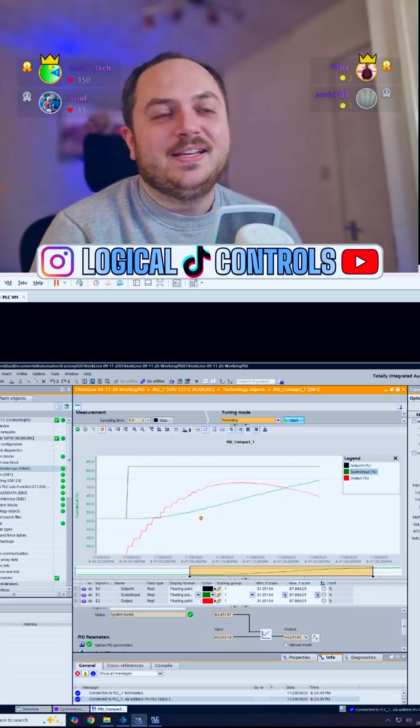What's going on with this?

We're going to be reviewing the PLC challenge submissions tonight.

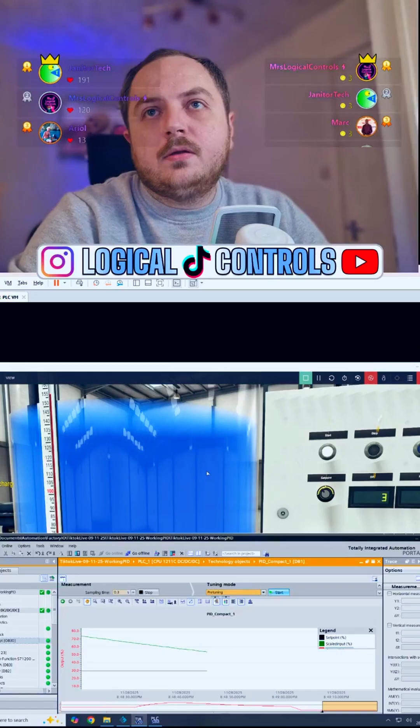Can't quite get it so I can show it all nicely. You can see the level is coming down. Oh, that's better, that's better.

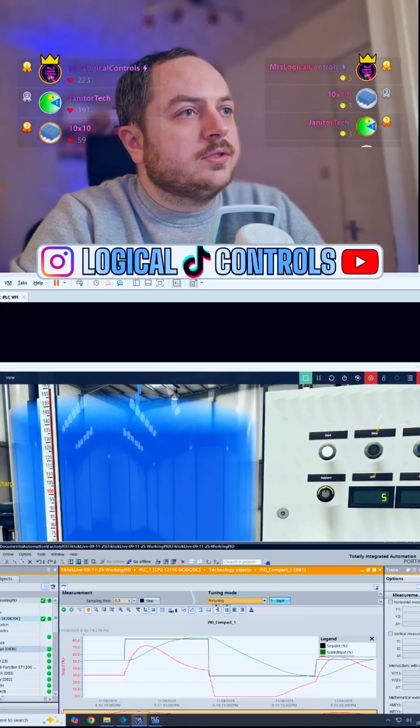We don't think we use that on roofs here, we just use tiles, but on shed roofs and stuff they use bitumen and get the big flamethrower thing out and melt it all. I don't know the technical terms of roofing, but that's what it seems like to me anyway. So all your houses are slates, okay.

Pink Beef, I think, this isn't a game, mate, this is just a simulation software. We're not going to be looking at all this tonight, though. Tonight we're looking at... so I've had a PLC challenge going for 2 weeks now.

Tonight's the night we're going to review all the submissions. There isn't many, I think there's five or six, something like that. But the reason I brought this up is because the submissions are based very closely on this, the filling of a tank. So we're going to be looking at viewers' submissions, basically.

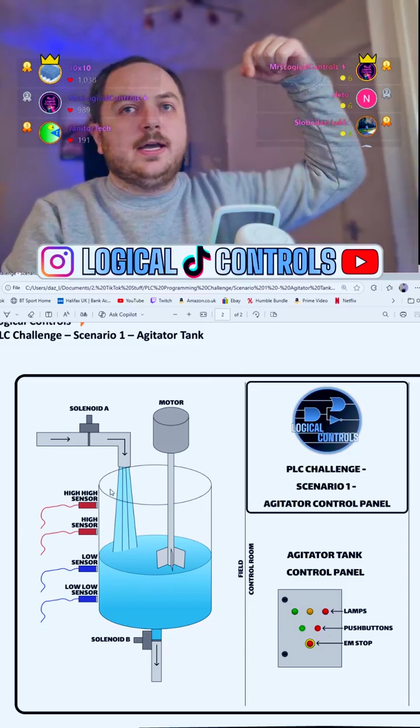We have some level sensors, this is all digital control, so we have some level sensor feedback. We have a low low, a low, a high, and a high high, which is pretty typical in at least the tanks that I deal with at work. There's normally 4 switches arranged just like that. Normally they're actually on a long rod, and all the switches are in different parts of the rod.

We also have a control panel which has on it some lamps - green lamp, amber lamp, red lamp. We have 2 push buttons, start push button, stop push button, and we have an emergency stop.

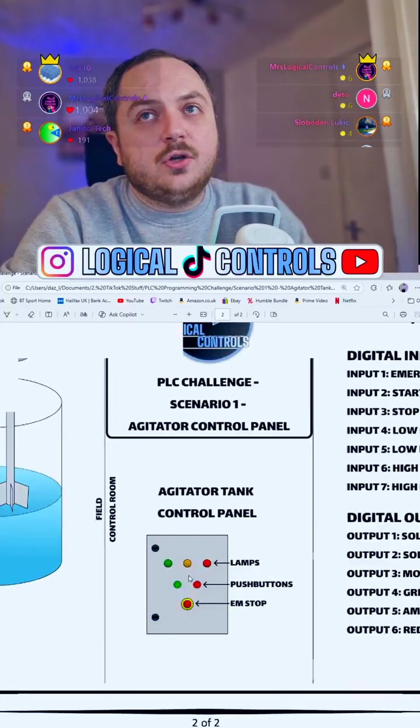I've detailed all the I/O here, which is basically what we've just run through. So we've got our inputs up here, we've got our outputs down here, and I basically put together a bit of a description of how this needs to work.

The idea was people can just go off in their own time, and if you're very new to programming, this would be a good chance for you to try and learn, practice, improve your skills. And if you program every day, it was a chance to just show off your skills, showcase.

Slobodan, thank you, appreciate that mate. Thank you. Evening, the engineer, how are you tonight mate?

So this was just for the people who are experienced in PLC programming, this was an opportunity to showcase your skills, maybe experiment a little bit, try something a little bit different. It's very simple, there's not a great deal to it.

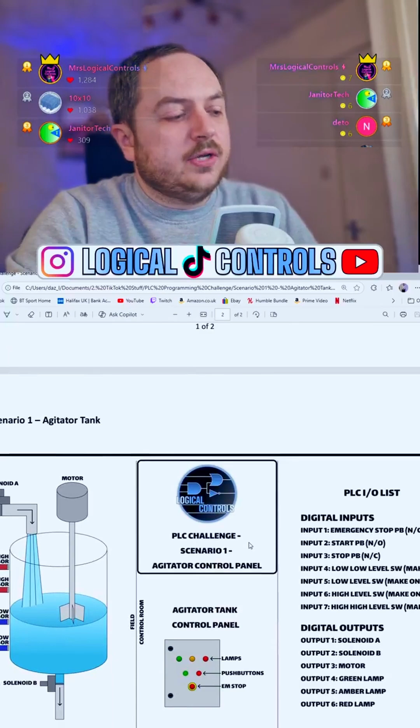So that is what we're going to be looking at tonight. We're going to be looking at other people who have submitted theirs. I've submitted my own one. We can even look at mine.

Don't look at yours, you just had to play it. Ash, I'm 100% looking at yours, mate.

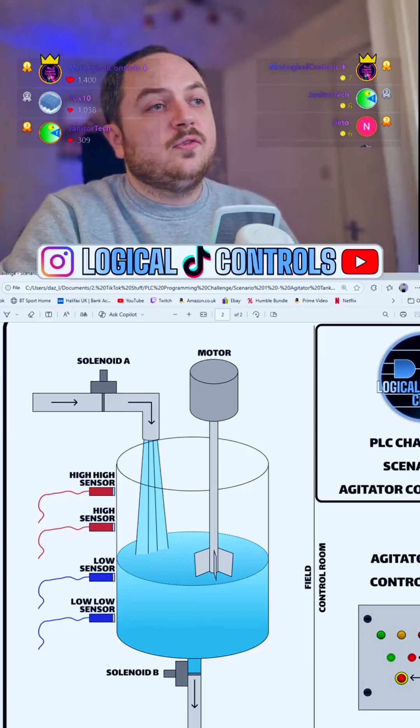Nah, it's fine mate, don't worry about it, engineer. It's all right, we'll do more in the future. Appreciate that, Jordsky, thank you mate.

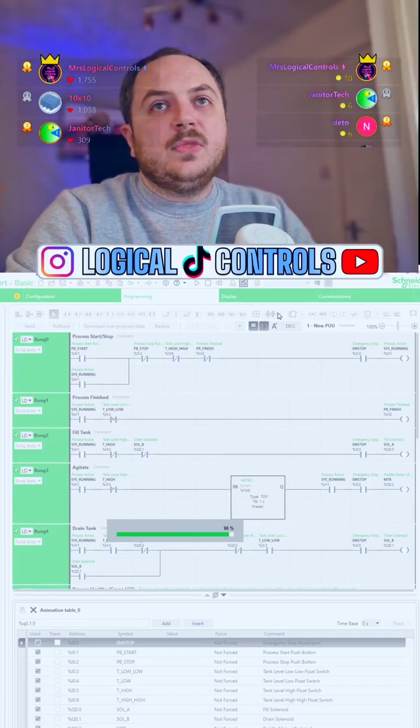Go away Norton. Right, so this was Big Lozzies submission. He did his in Machine Expert Basic, which was one of the free softwares. This is probably going to be a little bit difficult to simulate, but it'll be fine. Let me put it into simulation mode. Launch simulator, it's that one. And we're basically just going to look at how the software works, what it's doing, and just make sure it's roughly following the spec.

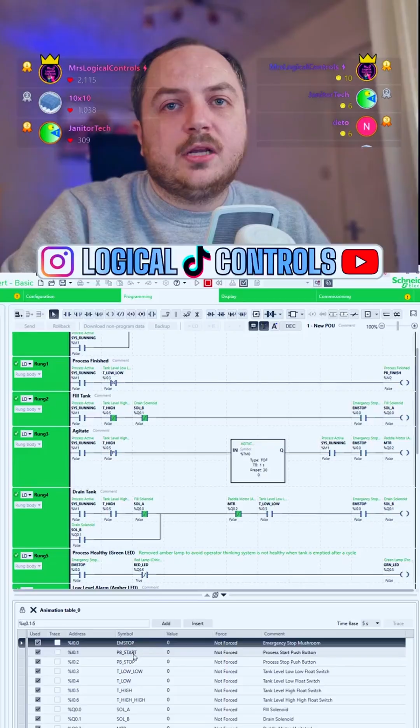So what we need to do is, I might have to simulate the emergency stop and the normally closed being on, because they are normally closed, so they would be on in a healthy situation. So let's put a value in, force to 1, force to 1.

Was there any more normally closed? I don't think there was - emergency stop and stop, the rest were make on rise. The start button was normally open. That's fine, okay.

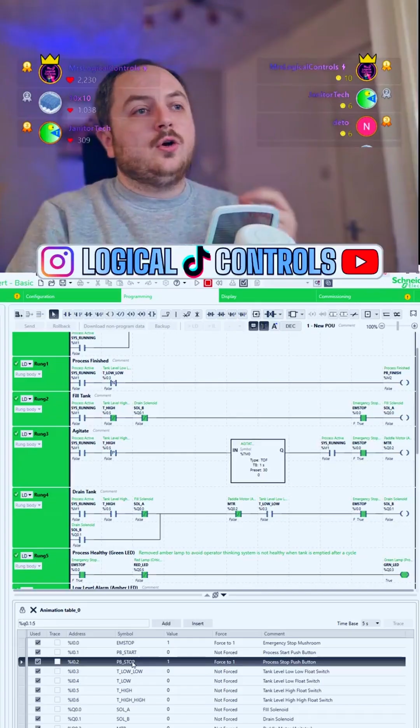So them two are on: emergency stop push button is on, and the normal stop push button is on. So because they're normally closed contacts, they would always be on when healthy, and only when you press the E-stop inward do you lose that signal, because it's a normally closed that you're activating.

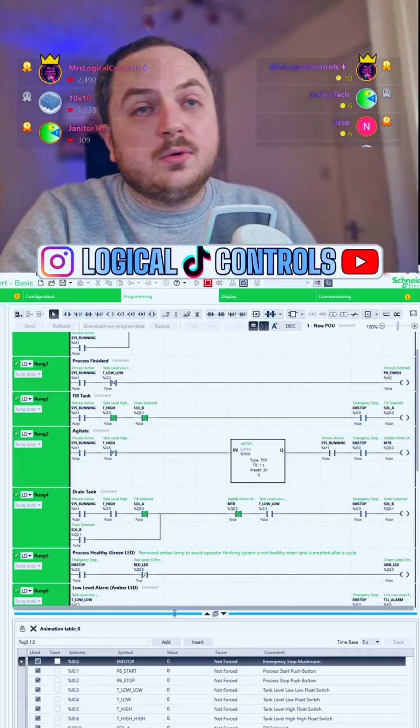Oh, Big Loz, you've done stop logic backwards. Oh no, we've failed already. That's fine, it's cool mate, what I'll do is I'll just turn them off. Don't worry about it, like I said, there's no harsh criticisms, I'm not going to tear your program apart. I just want to see it working, showcase what you've done, see how you've done things, because everyone does things different. There's no right and wrong way when it comes to PLC programming, as long as it works, that's the main thing I guess.

EM stop's correct but you didn't change it. Right, okay, so I'll put the EM stop to 1. Right, okay.

So to start off with, his first rung is the process start stop, which is his latch for latching up the start button. The minute I press the start button, the logic will go true. We'll then pass through the stop, the high high, the finish, and also the emergency stop. It will activate the system running, which should latch itself up. And then it looks like he's put the system running bit in every rung, which, to be fair, I think I might have done the same thing.

So let's start with that then. If I press the start button, what we should find is somewhere in the logic will be an output for solenoid A over here. You can see that, just about.

Can I pull it over a little bit? I mean, you guys can't really see that very well, can you? Maybe I can't zoom in too much. How far can you see? Not quite all the way. From there right across to there. Right, that should be better. You should be able to see that better now. Maybe, maybe? Appreciate the follow. Thank you, mate, sorry, can't pronounce your name.

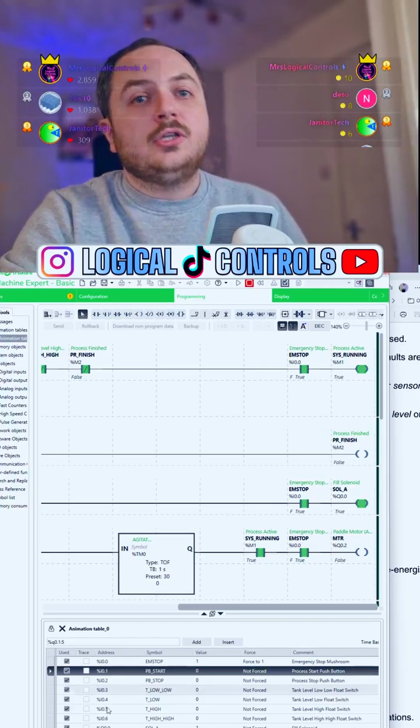So if we go back to the diagram, at this point what we've done is pressed the start button on the control panel. Solenoid A has opened and is now filling the tank. As the tank fills, the low level sensor is a make-on-rise switch. As the tank level increases, that switch will close, the low level switch will close, and we'll keep going until the high level switch eventually closes.

So let's keep going then. We're filling, solenoid A is still on. I'm going to activate the low sensor - this simulates the tank filling. It's got past the low low sensor, then gets past the low sensor. I'm going to turn that on as well.

Nothing should be happening at this point, so I'm checking the outputs at the same time. We have got a green LED - I don't know if you can see that very well. So the green LED is this one here. We've got the green light on because it's healthy now. Once we got past the low switch, it should have gone green.

Right, so we've got low, low. Once I put the high level switch on, so once the tank has reached the high level, solenoid A should go off and the motor should start to agitate the fluid in the tank. So let's go and turn that to a 1. I can see the motor has now come on, solenoid A has gone off.

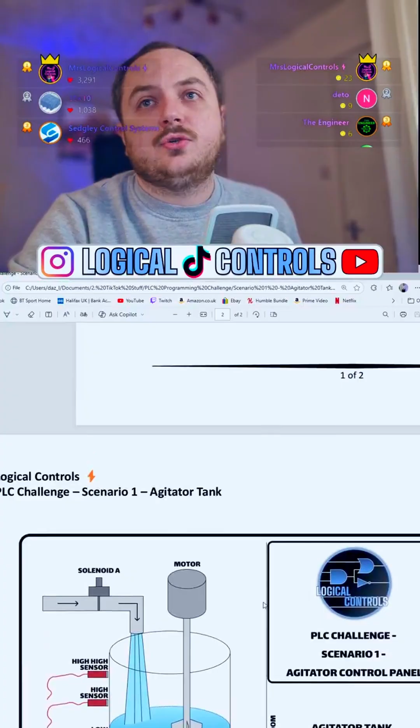What does his green lamp logic look like? As long as he hasn't got an emergency stop and he hasn't got a red light, his green light's on. I think that's fine, I don't know if I really specified what the green light should or shouldn't be doing. Let's have a quick look. Green light should be on when the system is powered, no faults are active, and the process is ready or running. I think I might have done that wrong, I don't think I read that properly.

I think mine goes off. But I'd say well done to you, Big Loz, that worked perfectly fine. If I do smash the e-stop, let me start the process again.

I do want to see the e-stop actually turning everything off. So I press the start button. That's gone off, solenoid A has come on. We go past low, we go low, we go past low, we get to high. The motor is now running. I smashed the e-stop. The motor stopped, the red light came on.

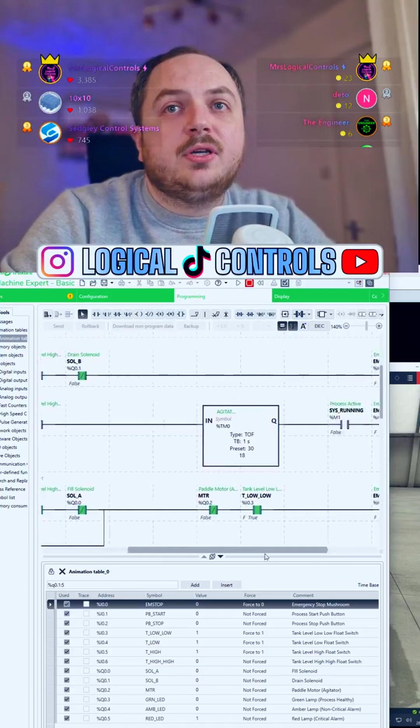So I'd say that works perfect, yeah that works perfect. So everyone give a big round of applause to Big Loz, he did that, he smashed it. It's difficult to show it on Machine Expert Basic because there's no... I know some guys have put HMIs on, so we'll be able to actually see it happening. I'm sure there'll still be a bit of simulation going on, but for the most part that worked really well, Big Loz. Well done mate, appreciate you joining and doing the challenge.

He also has... so let's just have a quick look as well. This was something I was looking out for, something I think I put in mine, which is basically a sensor error state. So if we go back to this diagram, this is something you would need to think about on a real job, on a proper tank. You have 4 switches, they work in a certain way.

Who's that? SF9er, I think. Appreciate that, thank you mate. Thank you for the fest pops.

You also added a bit of logic into the sensor. Yeah, I was just getting to that, Big Loz. Appreciate that, SF9er, thank you mate, really really appreciate that. So, yeah, on a proper tank you have these 4 switches.

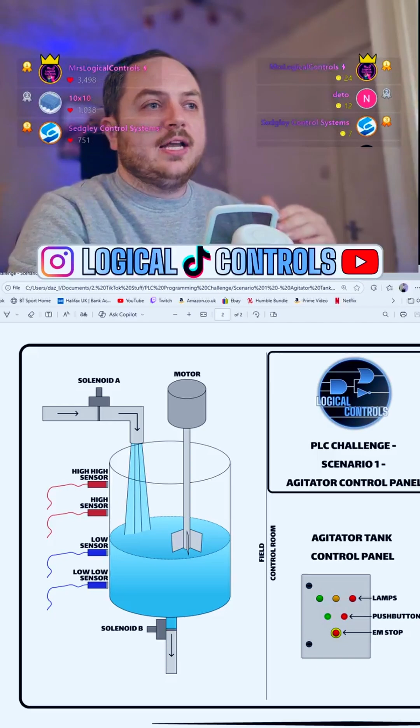On this one, they're all make on rise. So at no point should you ever have the low sensor closed, but the high sensor open - that shouldn't happen, because as the tank level rises, the switches close in sequence. And if the low sensor was off, but the high sensor was closed, there would be an issue there - there's something wrong with your switches.

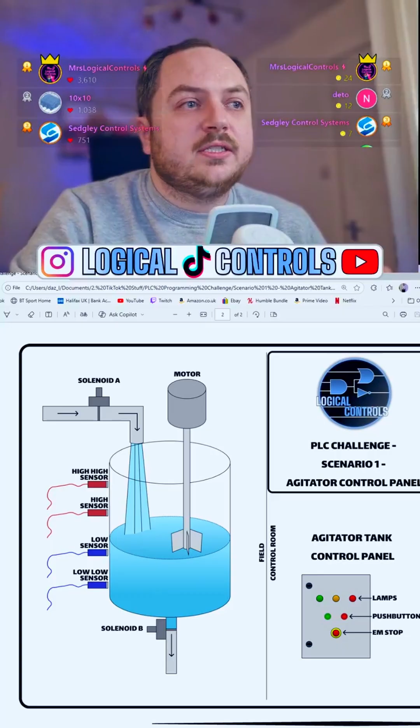So I can see that he has put in a bit of logic for that. And if we just simulate that, how does that look? So if the low was to go off now in this scenario - in fact we've already got a red light on because the e-stop's not on. Let's unforce that. No, we need to force that even. Red light's gone off, but if I put on...

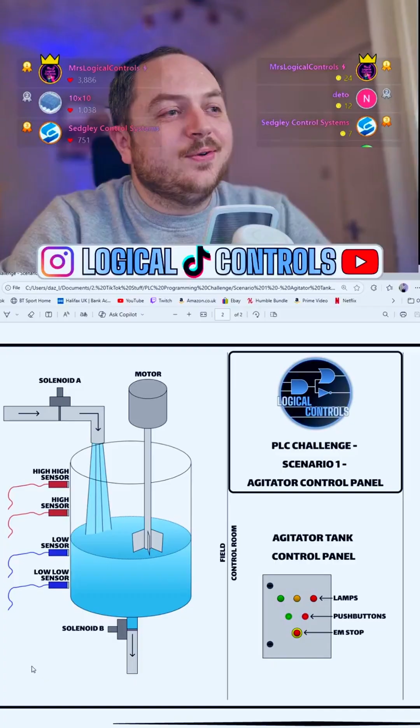If you're in France and do some electricity, I'm looking for someone to recruit. Deto, unfortunately I'm not - I'm in the UK, buddy.

What software? The software for this is Machine Expert Basic. This is a PLC programming software for Schneider M221 PLCs. It's free to download, doesn't cost you a penny. It has limitations - you can only program it in ladder or instruction list, and I think it might even be able to switch between the two on the fly somewhere. I know nothing about instruction list, I would never ever try and learn it. I can do it, but I can't do it while I'm live.

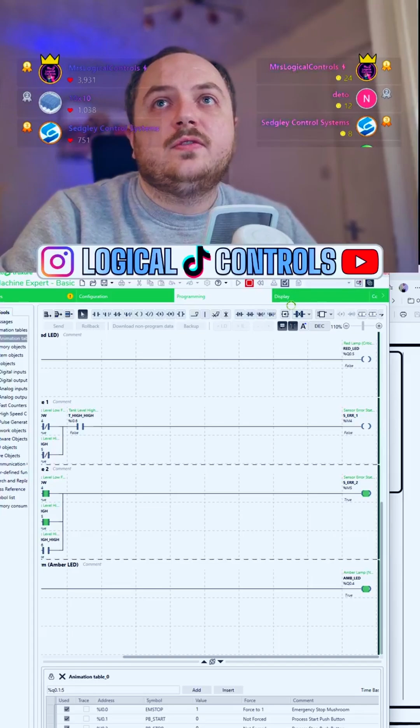So if I turn off the simulation, I can put it in instruction list format. It sort of can chop and change between the two. But yeah, I don't know this programming language. I know ladder though.

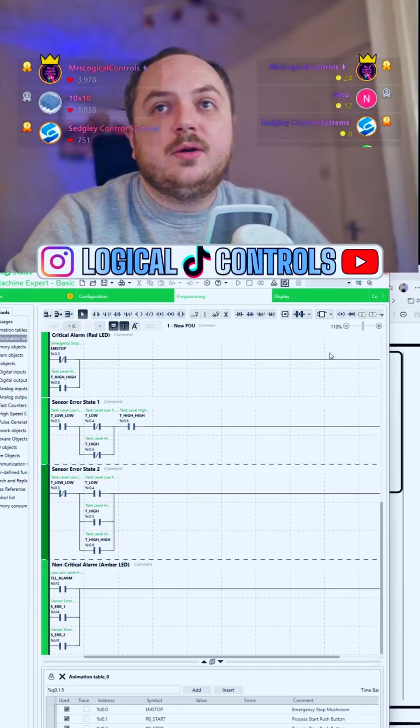Yeah, no, I appreciate you joining us as well, Big Loz. Thank you for that, mate. So yeah, well done, Big Loz, you smashed it. I'd say that one's done.

Who's next? Jack, who was Critical Shit, I think, in the Discord. I'll open up his next.

So it's just loading up CODESYS. Jack did his in CODESYS, another free software. This is the programming software I use for mine, mainly because it had the HMI element to it, so I wanted to add some visualization. Tommy, appreciate the follow, thank you mate.

Just let this load up a second.

Xander Robert, I don't really do SCADA, to be fair mate. Not really, I've worked with one or two maybe now, but it was a while back.

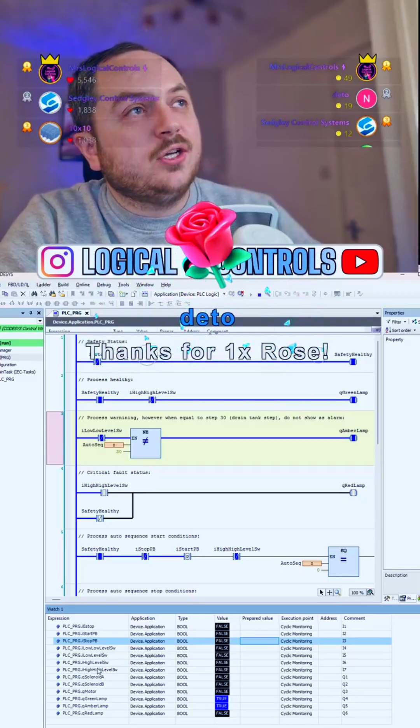So the first thing we need to do is press the start button. When we press the start button, we should get - let's go across - we should get solenoid A opening up. You can't see that. That's better. So solenoid A should open and start filling the tank when we press the start button. Eventually the tank's going to fill.

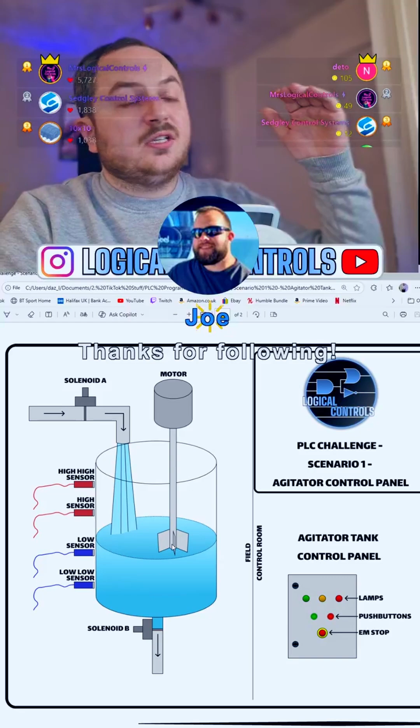Once we get past the low low level sensor, the amber lamp should go off. Once we go past the low sensor, nothing really happens. Then we get to the high sensor. Solenoid A should close and the motor should start agitating.

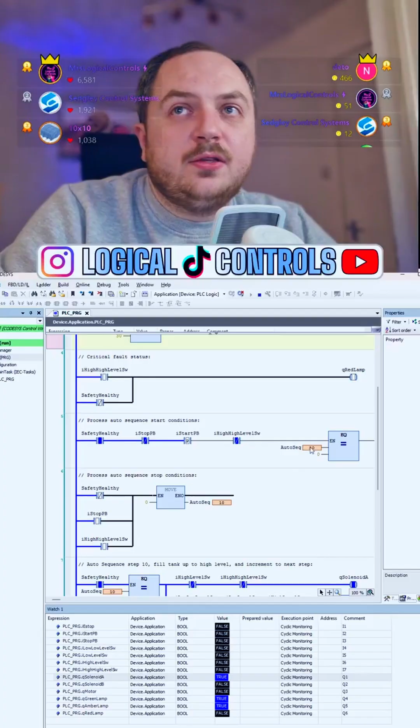So Jack's done this a little bit differently, he's done it as a sequencer. So we've got the value of number 10 in the sequencer, and that's because we pressed the start button. He put the number 10 in because we had these conditions healthy: the safety was healthy, which is his e-stop; the stop button isn't pressed in; the start button was pressed in, which he's done on a pulse, a high pulse - that's pretty good; and the high level switch isn't on. So once we get into sequence 10, that's where this is coming from. He doesn't need to do any latching because he's done it as a sequencer.

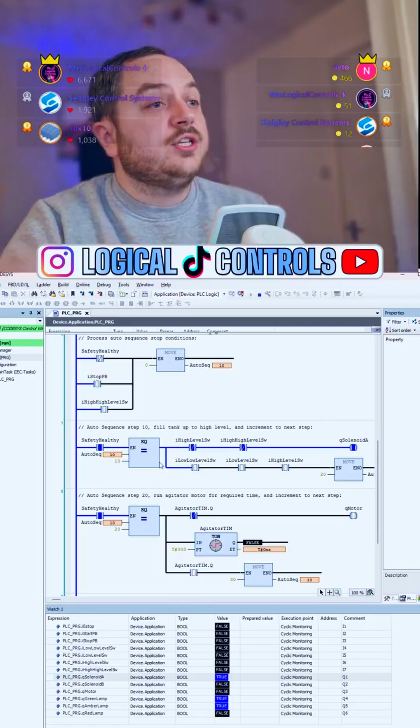Okay, so the tank at this point is starting to fill. The solenoid is open, the tank is filling. The next thing we need to do is put the low sensor on, and we should see the amber lamp, which is this one, go off. So if I put on the low sensor, that's this one here, F7. I need to get used to how you do this. And there we go, so the low sensor's come on, the amber lamp did go off.

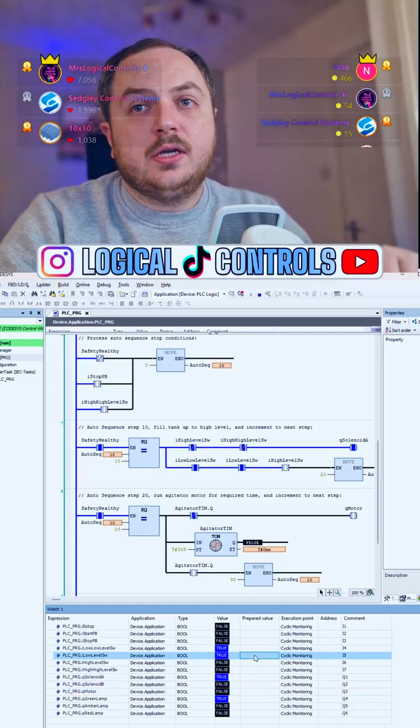That's good, so at this point the tank's still filling, the tank's still filling. We bring the low on - nothing should have happened when the low came on, it's still just filling. When we get to the high, solenoid A should go off, and then the motor should come on for 30 seconds. So I don't want to do that, I want to bring the high on, F7. So solenoid A went off, the motor is now running. So we've gone into sequence 20 now, you can see from the timer that it's counting up. And all this time the motor is running because this bit is on.

Once this timer elapses, this contact is going to open up and turn the motor off. I assume we go into another sequence, maybe solenoid B comes on. Looks like it, because once the timer expires, we move 30 in. It's working perfectly, solenoid B's on. The high level comes off, the tank's draining now. The low level comes off.

And once we get to the very bottom, solenoid B should... oh, I've not done it. Sorry, my apologies, solenoid B then goes off, and the amber lamp goes back on. That worked perfectly.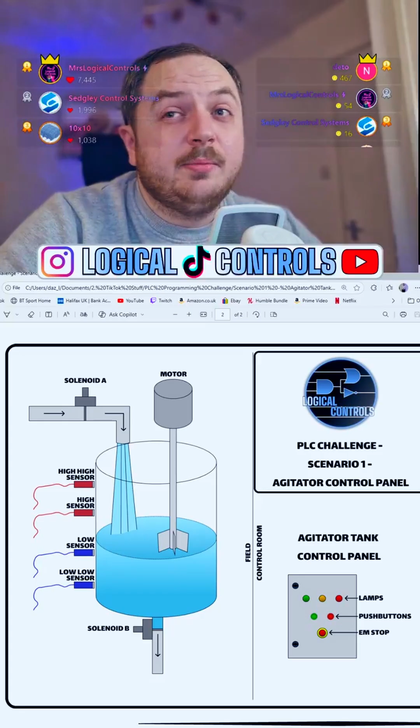Don't remember doing the amber lamp either. Yeah, sorry, I definitely missed leaving the green lamp on when the amber lamp's on. I did my logic where basically the green light could only be on if the amber and red light were off, so even I myself didn't do it right.

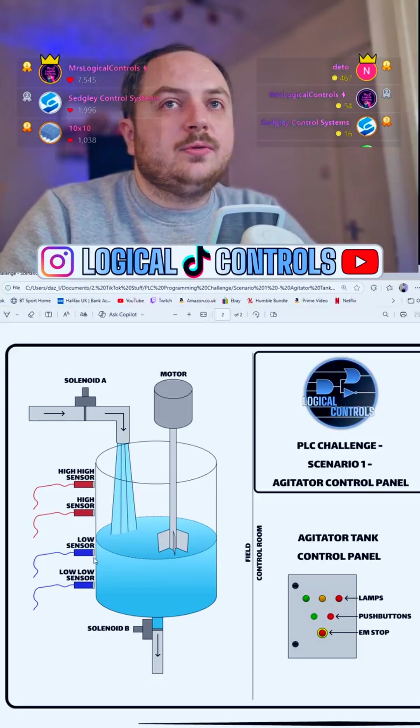Yeah, it is nice programming. I agree, and this was the whole point of the challenge, to see how different people did things differently. I like the way he's done the sequencer. And in fairness, although I didn't do a sequencer, and probably wouldn't on a normal job with a tank like this, I do like to see the way he's done it.

And it is a sequence, it's a process, step-by-step. So all we're doing here is following these process steps, 1 through 8. When I press the start button again, it'll just go 1 through 8, and again it'll go 1 through 8. So it is a sequence, and it makes perfect sense why he's used a sequencer.

It didn't even occur to me to use a sequencer, because like I say, it's not something I would normally do at work, using a sequencer in a tank filling exercise.

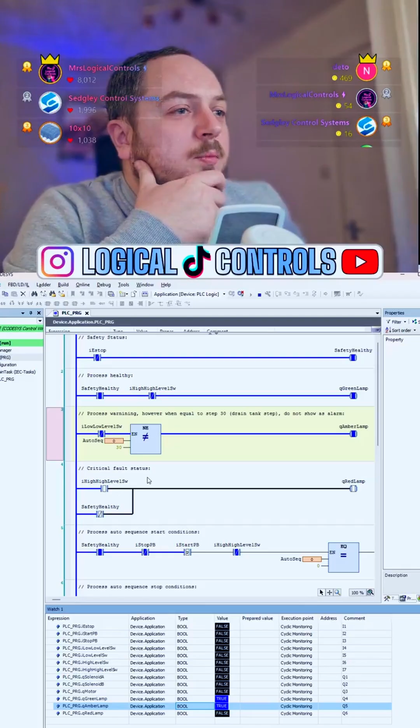Makes sense only in normal operation. If the flow of water stopped due to issues, the sequencer could get stuck. Yes, that would be the case, Michael, but he might have dealt with that. I don't actually know, I haven't looked through it enough yet.

Thanks for the follow. So these sequences there, has he got like a sequence 40 or a sequence something else?

Critical fault status is high, or is it E-stop? Oh, that's another thing, if I press the E-stop in, what happens? His red light came on, his amber lamp stayed on. That's probably fine, I don't know if I specified anything about that.

No, that was the first sequence. But, like I said, I'm not here to criticise or anything like that. I think he did a good job, I thought that was an interesting way of doing it.

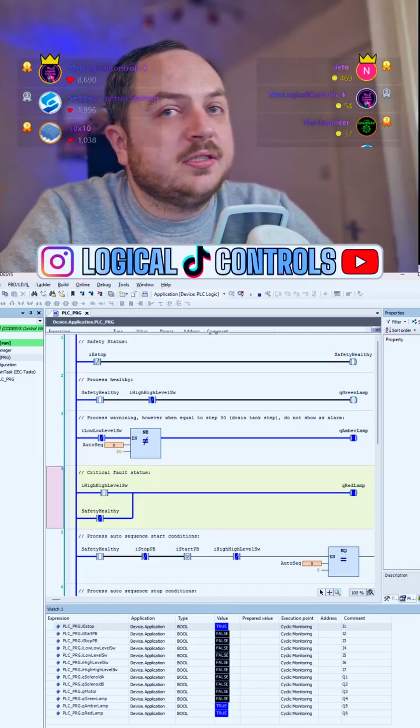So I use a lot of ABB switchgear - their ACBs, MCCBs, contactors, that sort of thing, but not really any of their control stuff. I guess the closest I've got to their PLCs, which isn't a PLC whatsoever, is their TruONE ATS.

Oh, he was chatting Dutch. Oh, okay, there must be other Dutch people in here then, is there?

Can I show how it goes to a next step? Yeah, I can show that. So, while we're live, who's that?

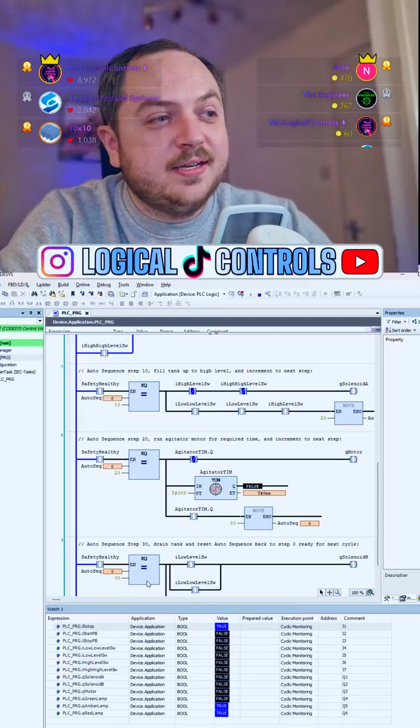Appreciate that. Right, so that was Jax. I appreciate him submitting, I hope he is in here somewhere and got to see that. I think that was another good submission, I enjoyed the way he did that. He thinks differently to the way I think. That was the whole point of this, to see how different people do different things. So let's close his down.

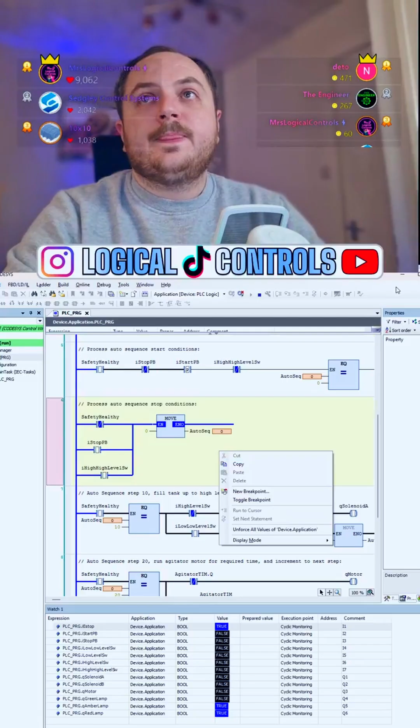Good submission, good submission. The next 3 are in Siemens. I might need some help with the Siemens side of bringing these in, because only one is showing as a file, which is Sedgley's. I assume it's because they were done in TIA 17. It doesn't look like it wants to open them, but I'll figure it out.

So let's just close down Factory IO for now, we don't need that at the moment. I'll just close it, let's bring this up. Close that project. Don't want to save, we're all good.

You're doing an online MSc in the UK - nice mate, what are you doing the MSc in?

You pronounce perfectly, Benelux is Belgium, Netherlands - oh okay, ah see, my dumb ass thought it was a football team. Okay yeah, I'm not good at geography, I'm not.

Engineering is about as good as it gets with me. Nice, nice. Zap is a zip file TIA.

So can I just open it from here? That's the question. Browse. Automation, PLC challenge - will it just open? No.

What do I do guys, what do I do? You can just open it from TIA. I'm doing something wrong then. I mean, I could just look at yours, Ash, I guess.

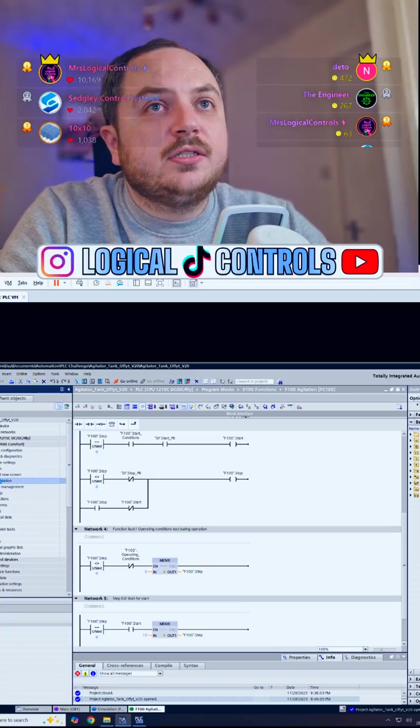Right, you might need to help me guys, because I don't really know how to work the HMIs. Screens, I'm imagining, simulation - if I bring that up, should be able to simulate this, right? Yeah, oh I see, yes, I have seen this, I've seen the picture in Discord. Yeah, he went to town with this one.

Tools, no. Online simulation, start, I think. I'm still learning this Siemens stuff.

Went to Amazon BVA1 this week to test out new features. I'm here at night watching PLC videos. Nice, Michael, nice, what are you doing there? What sort of work do you do?

deto, I don't speak a word of French, mate. I have no idea what you just said.

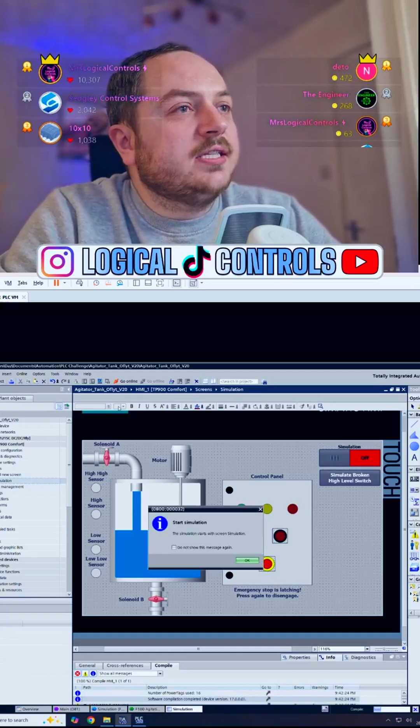Had quite an interesting fault the other day with a dodgy isolator in an MCC causing an e-stop trip. How was it, was there an auxiliary contact or something?

Start simulation. Okay.

I've not used any of the HMI stuff yet in TIA Portal. Can I make that bigger? Will it make it too big? No, it's probably better like that.

Need to go to control panel first and set the COM route for the PLC. Too many tags, power tags have been configured. Right, I don't know what I've done wrong. So this isn't going to work, is that right? Compile, simulator, right, so do I close this down?

Oh, you work for Amazon. I see.

Right, I'm going to assume this doesn't work, so I need to do something. Compile, up here, compile. Simulator, did I not do simulator?

Online simulation, is it with Tag Simulator? Is that what we're talking about? With Tag Simulator, HMI won't work - you need to simulate the PLC. Add tags and PLC simulate. Bloody hell, there's a bit going on here.

Hang on, right, I need to download the PLC. Okay, that makes sense, that does make sense. The PLC needs to be written into my simulation first. Connect.

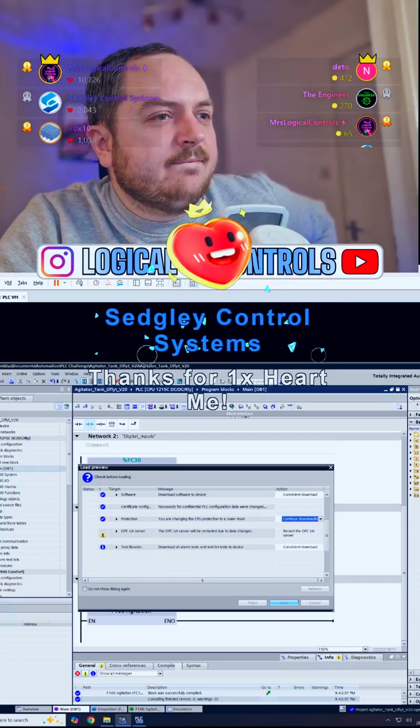Ash, are you there buddy? Still connecting - here he is. How's it going mate? Good, yeah.

Yeah good, you'll need to set the COM route to get the HMI to communicate with the simulator. Right, you got to talk me through it buddy. Control panel, control panel - where am I looking?

On your computer, control panel. Oh, in my actual... oh I see, on my actual computer, right, hang on then. Control panel.

Get rid of the categories and put it on the main view. PG. Set PG/PC interface, that's the one. Right, bloody hell, you have to do a bit then, don't you?

And then go to PLC sim. Is it all a bit small? I don't think I can make it any bigger. You're going to look at my forehead while I'm looking closely.

Stay where you were, don't click on that. Right, on the box below. Yeah, you see PLC sim. PLC sim local.

MPI maybe, not MPI. There's a TCP Profibus - do the one below. No, not Profibus. TCP, yeah try that. Right, now that's it.

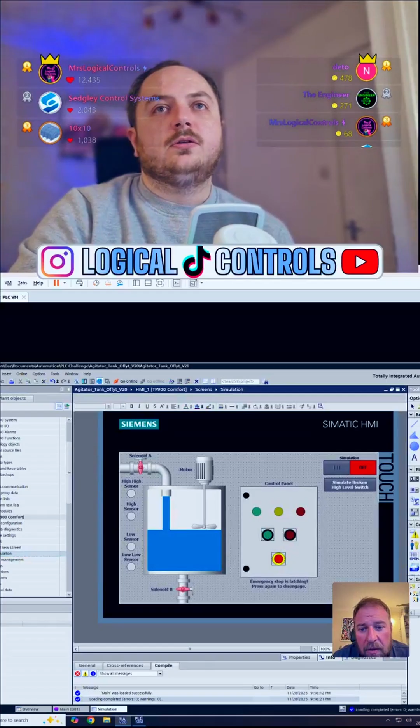Start, finish - now you should be able to just click on the HMI, click the same simulate button in the thing. Right, okay. Screens - can't see, no, just the main object. Oh, I don't need to open anything up then. No. There you go, just hit simulate. So now that gets the PLC talking to the HMI - PG set up.

Would I have to do that every time or is it done now? No, it's set until you change it to something else. It just allows you to - because obviously you can have a simulated HMI talking to a real life PLC. Yeah, I see.

Because you haven't got WinCC advanced runtime in, you get a tag warning - the simulation's just using HMI runtime, that's this warning here. So what would I need to do then to get rid of that? Put a WinCC license on - WinCC advanced runtime. But will it still work now? Yeah, it'll still work, it'll just keep popping up with a warning.

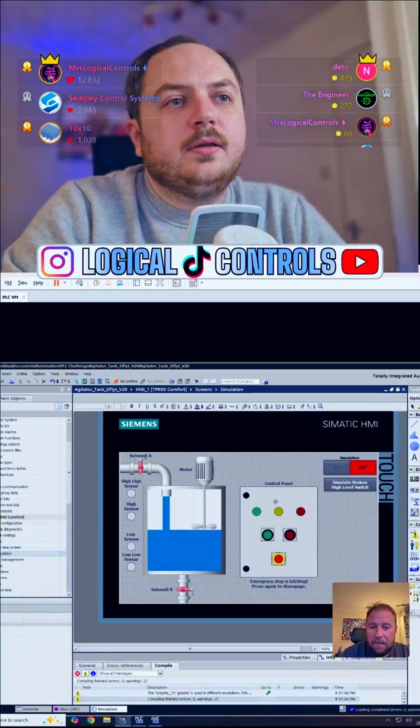Right, so I'm assuming I'll just click one of these buttons. You might have to change the interface, I can't remember which one it was. Is PLC sim up and running? I think so - put the PLC into run. Oh, is it not already in run? Can I do that from there? Yeah, it is in run, I think. Yeah, it's in run. I can't see the whole screen. Yeah, it's a bit small, isn't it. It's probably one of the other PLC sims in that list in control panel.

Well, that's not the screen anyway. No, that isn't the screen. You're right, I just noticed that. But it's not really doing a lot though. Anyway, yeah, I've probably told you to click the wrong PLC sim in control panel.

Oh, I see. So do I go back now? Just go back to control panel. Right, we'll get there. PG. So hit that's local, PLC sim local. Local, yeah, just hit that.

Okay, don't need to do anything else. No, just hit simulate on the HMI again. So on there, simulate button. Yeah.

One of them will work. Not yet. It hasn't got an error saying it's got no communication though. Where would it tell me that, or would it just pop up? It's just about this tags thing. WinCC runtime, too many tags. That doesn't matter, right, not for simulation.

So it's not that one. Do we just keep going through them? Import tags into simulator, you shouldn't have to, that's what the import engineer tags said, into a simulator. Right, what next then? What do we try next?

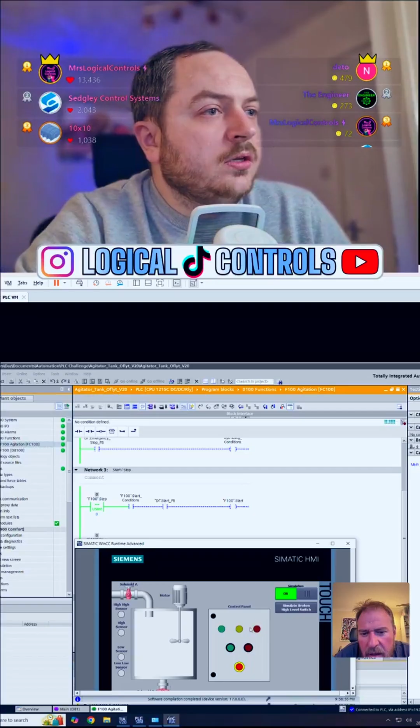But you change the interface. The lights worked before, did they? So, or maybe if we go back to the other interface then. Would I need to go offline for that, Ash, do you think? No, just close the simulation down for the HMI. Yeah, I've done that, that's good.

So when we was on TCP, we reckoned it worked. I normally use the ISO, I think. But ISO, this one here? Yeah, I think so. Let's give that a whirl. Right, so now simulate.

So the button's working, the lights are not on though. So you think the lights were on, Hugo? Is the PLC running? It is running. It's definitely running.

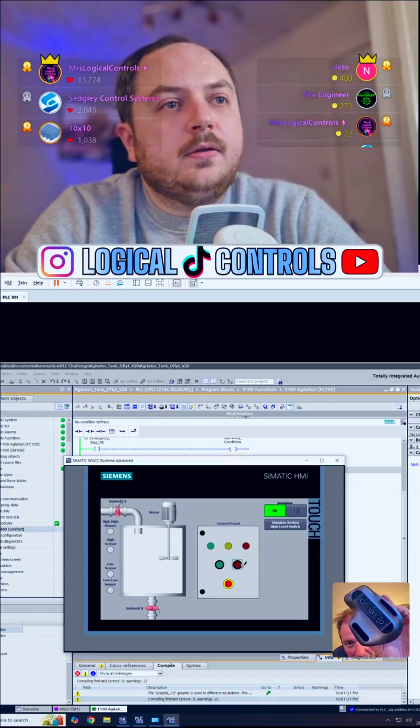MX Master 3S, best, no the Work 4's mouse come out and it's way better. Have you got one? Is that what it is? I'm using a Razer Viper 8K. There's a 3S and there's the 4. Ah I see, what's the wheel do? What's that for? Side scrolling. Oh, that look, yeah, that's handy isn't it? And that's a button. But the 3S have got tiny slide pads on, and they've upped the slide pads again now. Oh I see, so does that make it move a lot more smoother? Yeah, and the button clicking's way nicer, it's so much quieter. I got a Razer Viper at home, and then I got one for work just so I was consistent, I didn't want to change mouse up all the time. You got a 2S as well, you must like them, a 2S, 3S, and a 4.

Right, it was on local before I think. Well, I think he said the lights came on when I went to TCP. So do I just double click it? Yeah, I guess, yeah, double click it. All right, do that, what's the simulator on? You can have a look on the simulator, it'll tell you what it's on. No idea, what am I looking at?

What's it say there? PLC Sim Soft Bus. Yeah, yes that's ticked, internal. Yeah, so it should work on the local one, but... Well, let's try this anyway, one, give that a whirl.

Oh, there you go, ah okay. So the TCP one works, the light's on. I press the start button. Oh wow, look at that. Appreciate your help, Ash mate, thank you for that.

deto said, is the 4 really better?

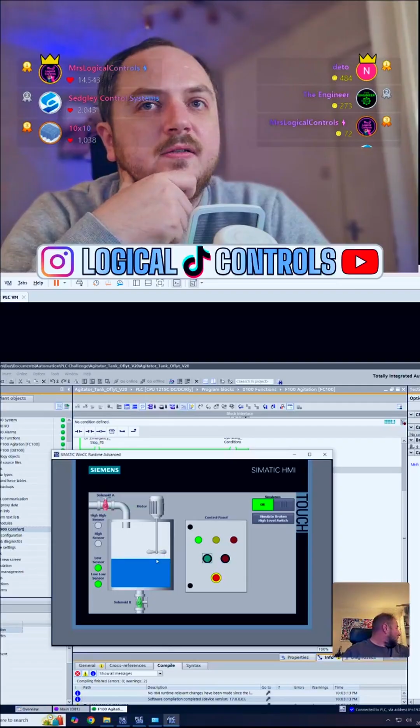When simming everything, you don't need to mess with the PGPC interface. Well, we wasn't on TCP to begin with, actually - I think we was on local. We went on to TCP and thought it wasn't working, then went back to others.

That HMI is impressive. It is, Loz. Yeah, I'm well impressed with that, because that all worked absolutely perfectly. Let's start it again - so it starts, it opens solenoid A. He's even simulated that, you could even see it's turned green now.

The low-level sensors come up, the yellow light went off, the low sensors come up, it's still rising. We get to the high sensor - it should close solenoid A, open solenoid... no, in fact it starts the motor at that point.

Yeah, there we go - the motor runs for 30 seconds and then it starts to drain again. Yeah, he smashed that there. My simulation doesn't look anywhere near as good as that.

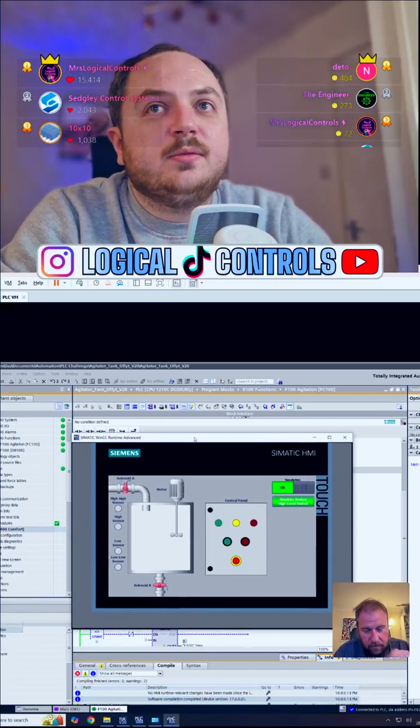Red alarm should activate - in fact I said it required shutdown. But I don't mind what he did, I'm not criticising. I feel like this is probably one of the best ones. It probably is going to be the best one. It will, because it's a lot better than mine. Is it? It's better than mine as well.

Have you looked through it already, Connor, have you? Yeah, I think he smashed that. That was really good, I enjoyed that. Let's have a look actually what he's done then.

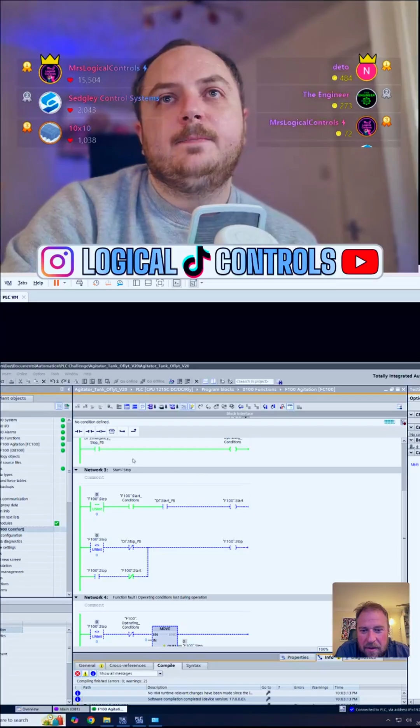Okay, where's best to start, shall we say? Let's look at what he's done with the I/O first. So he's done some... what do they call it in this? It's SCL, is it? State... yeah, there's another name for it, isn't there? SCL - I was on one of my videos, someone was talking about COP. Open mine and you'll see the other one - AWL, something like that. Is that the German versions of it, or STL?

If you open mine up, you'll see some. Oh, have you done it in STL? Not all of it. Oh okay. So for this, he just said if the simulation is not on, then emergency stop is emergency stop.

Oh, has he used a DB or something? It's just mapping some bits for simulation. Yeah, I see. Right, well that's pretty good.

Alarms, let's look at that. What has he done that in? Ladder.

So the green lamp's on if he hasn't got a critical or non-critical fault, which is the red lamp or the yellow lamp. That's basically what I did as well, I think. A critical fault is the emergency stop.

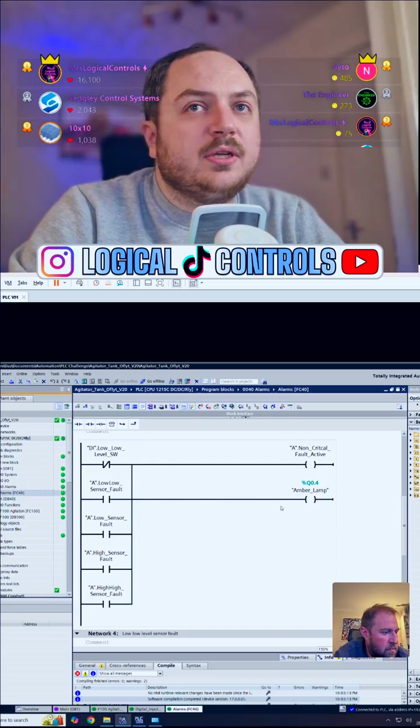If the low's not on - hang on, we've got two there, low and low. I'm guessing one of them is meant to be low, I think. The high's not on, but the high is on. Yeah, basically he's got all the faults - if any of those switches are in the wrong configuration, then that's when he brings up the amber lamp. So that's the alarms, that's all good.

Agitation. Then let's look at this - zoom in. Can you see that? Okay, I seem to have lost my preview. I normally have a little preview to see what you can see. I don't know where it's gone.

Can you see that alright, Ash? Can't see a lot, but it might be easier if I turn the glasses off. I don't know what I've done with my little preview thing - not too bad, if you just drag your project tree left a bit, that's better, we can pretty much see the whole width. Yeah, so normally I have a little preview window that shows me what it looks like on a phone, because what I see on TikTok Live Studio actually gets cut off - it's actually smaller than what I can see, so I never really know what you guys are seeing.

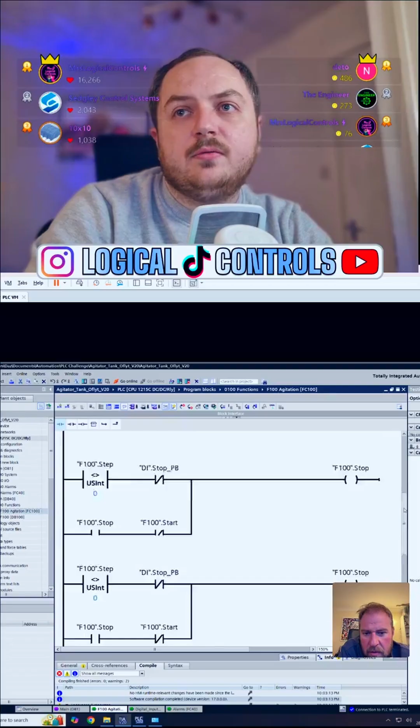Okay, so F100 operating conditions, that's this here. If the emergency stop is not on, so if it's not activated, this is closed, which brings this on, which is essentially start conditions, I'm guessing. Start conditions, which is this one here. He's also looks like he's done a stepped thing, he's done a sequencer, so I guess down here, if the E-stop's in, I think that's basically saying it's operating conditions, which is from the emergency stop, does the start condition.

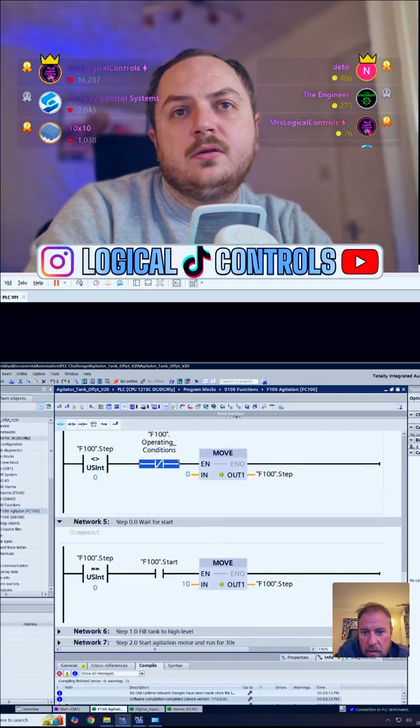So if that's on, move a 0 in, wait for start. Oh, wait for start, that's his - what's that one? Have we got to that one yet? That's this one here. Oh, I'm getting confused here now, I'm too zoomed in, I feel like I need to zoom out a little bit.

Basically, if he's in step 0 and his start conditions is true, and the start button's pressed, that then activates the start bit, which then puts a 10 into a sequencer. And if a 10 - oh hang on - if a 10's in his sequencer, and the high level switch is on, or the high high level switch is on, then he puts a 20 in. If the stop button's pressed, he goes back to 0. So that's basically fill tank to high level.

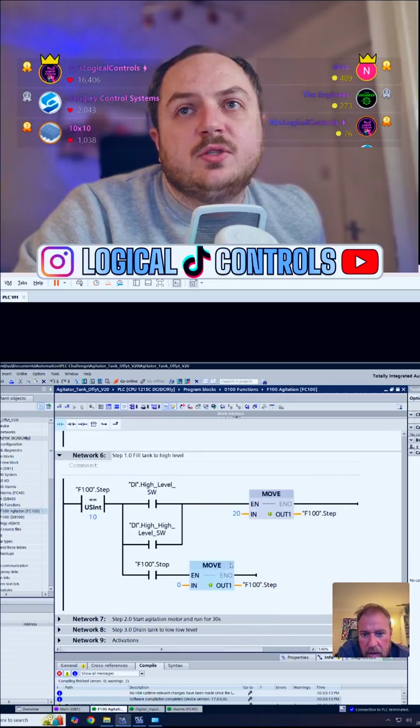I'm assuming he must be doing more than that - you'll have an output block somewhere. Yeah, that's what I was thinking, it must be doing a little bit more than that.

I'll have another look at the FC or FB with the outputs map. Oh, there they are at the bottom. He does have a system. Yeah, you're right, so that's his steps then.

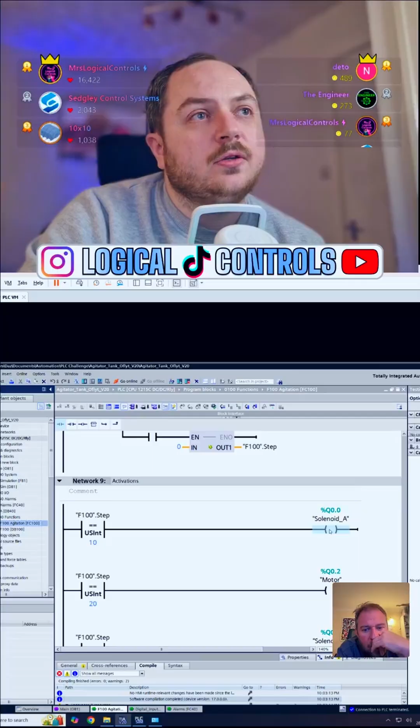So in this one, if he's in step 10, solenoid A comes on. If he goes into step 20, that's when his motor comes on. If he goes into step 30 - this is quite similar to, I think it was Jax who did a sequencer - so if he's in 30, that's when his solenoid B is on.

But at the same time as doing all that, so at the same time as the steps, he's also doing the conditions for going into different sequences.

Yeah, that was a little confusing to get my head around, but that's probably just me reading it and not opening everything up. But I get how it's working now. So these conditions here are for moving into the next sequence, but right down at the bottom is what he's doing during that particular step. So that's pretty good. I'm interested in what he did in the simulation.

So zoom right in. When the simulation's turned on and solenoid A is on, which is the fill-in, he's using the internal clock memory of once every 2 hertz, which is half a second. Yeah, twice a second basically. So it's on for half a second, off for half a second, on for half a second, off for half a second. That's basically how it keeps going.

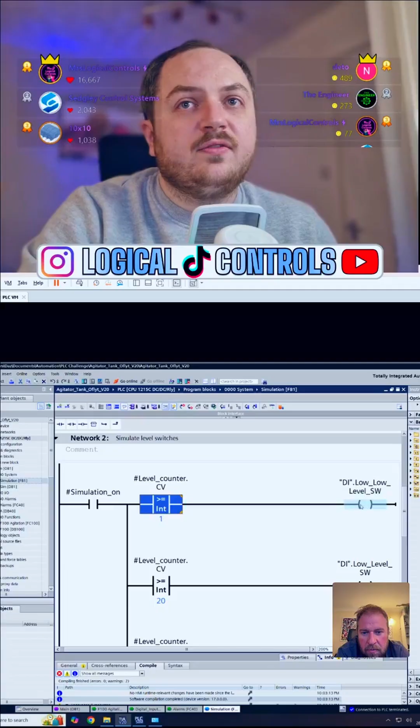It's just increasing the counter, and that's where this PV is coming in. Oh, in fact his PV is set at 61. There must be something in the simulation, I guess. He's got an overfill for his high, I think. He counts down when solenoid B... that makes sense. Level switches is basically comparing the value of what's in the counter. When it gets to a certain level, that's when he activates a switch. So 20 is where his low level's at.

Oh, my mouse wheel is terrible. When he gets to 50 or over, the high switch is on, unless that little button was pressed on the HMI, which breaks it. When he's over 60, that's when his high is. So I guess that's why it's 61. His tank's basically 0 to 60.

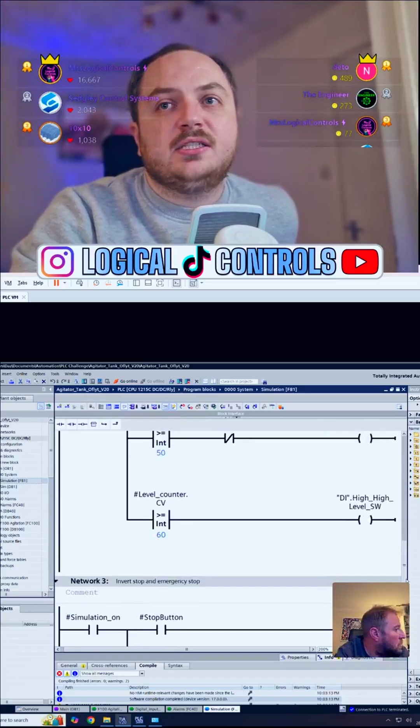This is how he's inverting his emergency stop and his push button. That's pretty good, so he does that when he's simulating. And then motor animation - what's he doing there? If the simulation's on, the motor's on, just another counter I guess. It's just states for an image. Just yes, I see, yeah. So it's rotation, yeah, that makes sense.

Yeah, I'd say critical - was it Jack? Not Jack, in fact I'm talking about the wrong person. It's... Oflyt, that's who it is. Apologies for that. Yeah, I think he smashed it.

Sensor discrepancy, normally closed is right. Oh yeah, these are older comments. Yeah, I think he smashed that one. That was a bit of a nightmare to get running, but it was worth it in the end, I think.

I think we looked through all that. Yeah, I'd say so far - not that I'm rating or anything, not criticising anyone - but that one was probably one of the better ones, or probably the best one out of everyone we're going to watch tonight. Right, so that's that one done. I'm going to close that down.

I say, while you're on, Ash, you can talk us through it. I feel like that's the best way of doing this.

What I've done, so - let's open your one up. I feel like that should just close, should it? Don't need to save. Closing project. Did that open? Oh, I don't know what's going on here. I'll have to open it from inside, won't I? Because it's a zap, yeah.

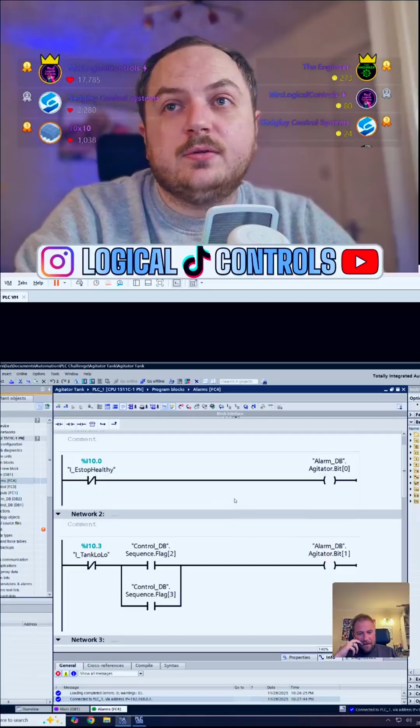Right, so it's a sequencer. So you've done it as a sequencer as well, then? It is a sequencer. There's just alarm bits in there.

Let's look at. I mean, you tell me where I should be going. It's your program, you know it better than I do. I don't, I've been asleep. How long did you spend on it? 10 minutes? 20 minutes? I mean, that's long. Hang on, I'm just opening it up.

Right, so this PLC sim I/O stuff that I need to do, what do I need to do? Somewhere on the left where I can't see. Click on the second one down. Now drag it over to the right. And do sim table, add a sim table.

Right, and now you should be able to, if you just type I0 to 7 - I0.7, 0.7 - you can copy them in from somewhere. That's not a percent I, sorry, percent I0. You don't normally need to put the percent in. Just hit enter, let's have a look.

Where are your tags? Are they in tags? I'm assuming, yeah, in the tag table. Just copy those addresses in, or even the.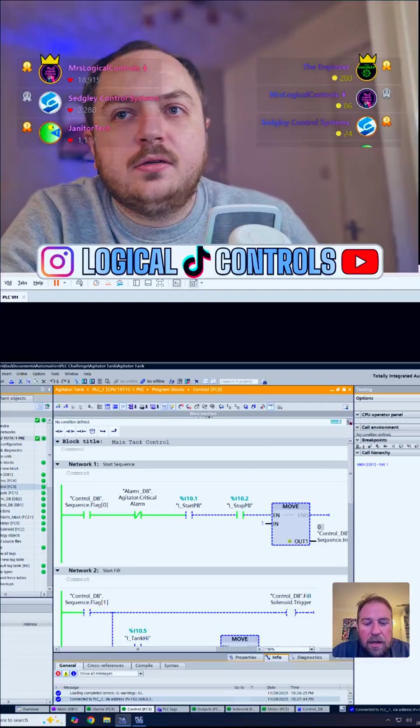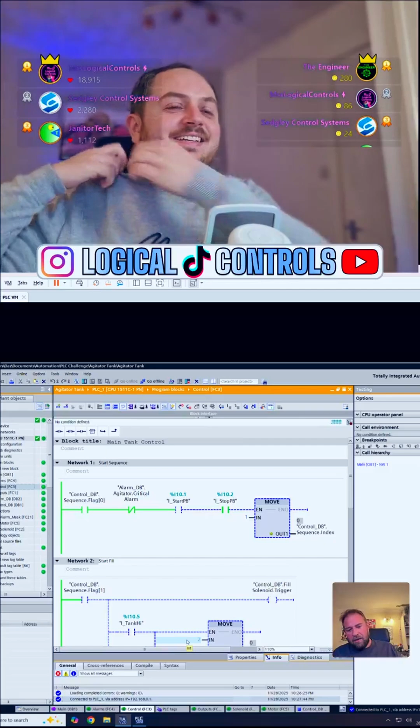What do they call it? Global objects in Rockwell? Global... something. I haven't got that laptop here to look. Global screens, global displays.

Yeah, the engineer understands it, so you must know some instruction list as well. Right, yeah, so talk me through this then - what are we saying? You said you haven't done it quite the same as the other guys. What have you done? I do it just a little bit different.

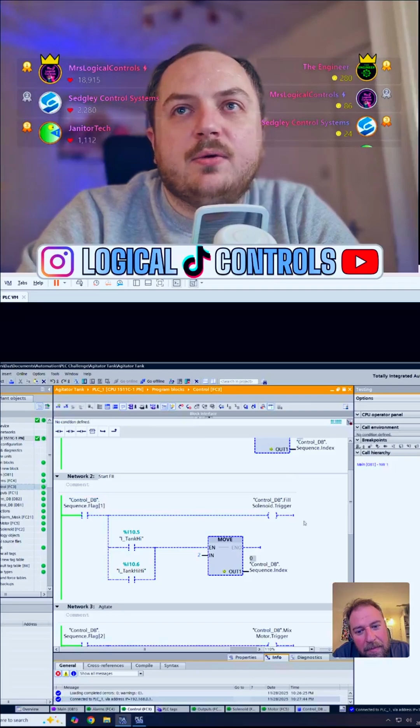So I move it into a thing, but then you'll notice on the next step it uses a bit. Yeah, so that's how I would do it as well. If I was doing a sequencer, I would - you would have seen it with the factory I/O stuff - but no, in fact I wouldn't use a bit, I would do the comparison. Yeah, I see, right, so you've done it a little bit different there.

If you go right to the bottom, right, flag 2. See, okay, so you've done it as binary then, haven't you? So you've got a 1, a 2, a 4. No, oh no, you've done 3 there. That's not binary. Yeah, I haven't done binary. I thought that's what you were doing here.

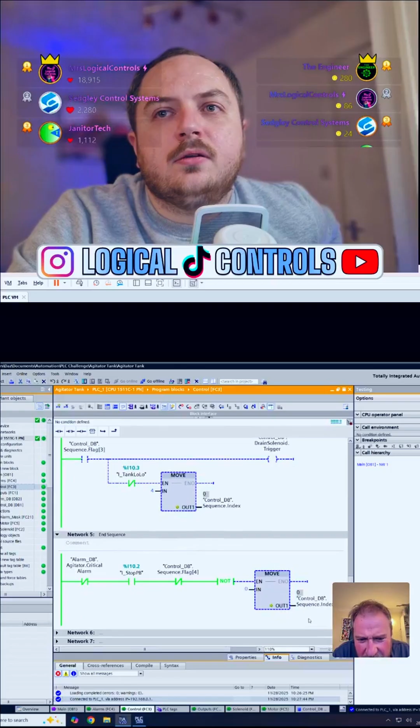So what's this 2 mean? It's an array, it's an array of bits. But if you go to the bottom, right to the very bottom - no, sorry, I've not opened everything. So that's where it does it.

Fill block - so I fill all the flags with zeros. Yeah, so that basically empties the whole array of bits. And then the next bit just does, for whatever the index is, load that flag. And it just means that it processes the whole sequence before it sets any outputs, or before it acts on the next thing.

Right, so you never get in a state where it can flick straight through. Right, so it does this all the time, it's putting a 0 in... I don't know, explain that again to me. So it empties the flag right at the end of the scan. It empties everything. Oh, see.

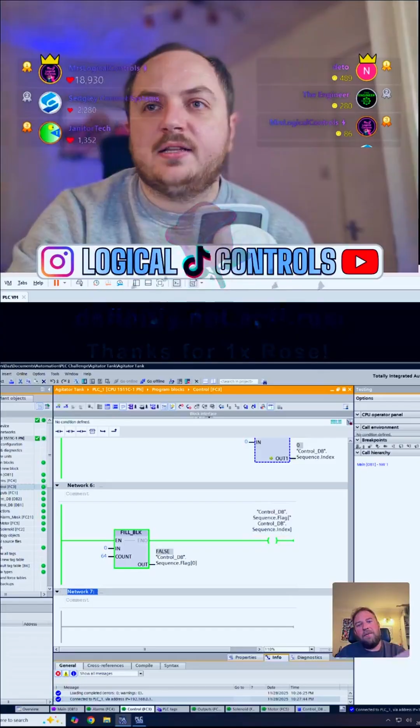So every scan you're doing this. Every scan. Right, and then the last coil, it's an indirectly addressed coil. It takes the counter number and sets that flag. Ah, see. Yeah, I mean, I definitely wouldn't have done anything like that. You end up with every sequence healthy.

Talk me through the alarms then. So they're quite easy, they're just set, they're just activating bits. But you're still using these flags because it depends what sequence you're in, I'm guessing? Yeah, it just blocks the low one of the alarms when it's doing something.

So you've got an alarm DB, agitator bit. So that's... is that an array? No, that's a UDT, is it? Yeah, with an array in it? Yeah. And what are you using the bit array for? I'll show you. Oh, okay.

So if you go to the bottom of it, it's just an alarm handling block that I use. So you pass your bits in, which is I think the line above - I convert all the bits into a word, you can just slice the word obviously and do .x. So the gather just converts the bits to a word. Oh okay, it's like binary bits.

It's an array of bits, isn't it? But they must mean something to make a number, do you know what I mean? So it literally just takes 16 bits.

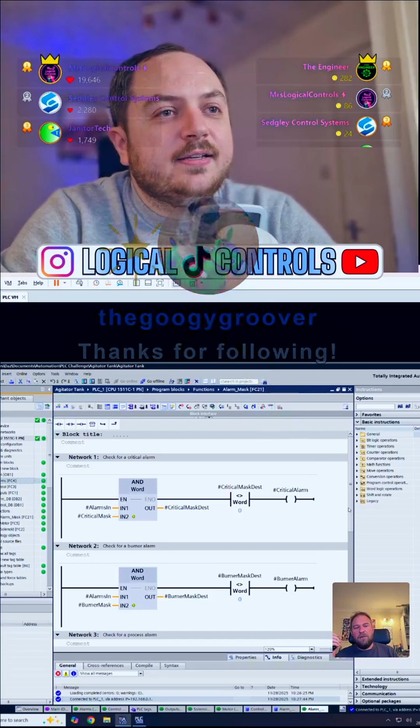I'll send you Studio 5000, you get a 7-day grace period. Do you? Yeah, I've never touched it. I did a course and it used Studio 500. Is it the older one? Yeah, Logix 500. That was interesting because you didn't use labels or anything, that was like B bits and N integers or something. Totally did away with absolute addressing.

Did it? Yeah. Oh, so you don't do that at all anymore? No. Yeah, that was a bit mad anyway, I thought - other than for addressing your actual I/O. There's nothing for your internal memory, for your memory words, memory bits and things like that - there's no addresses, it's just...

Unfortunately, you've missed your one. We did do your one - you did yours in CodeSys, didn't you? This wizardry - this is Ash's one, this is Sedgley Control Systems' one. But we did yours earlier.

Studio 5000, you get a 7-day grace, but you can reactivate the 7-day grace.

Greetings from Iceland. Good evening.

Lef Cosmic, maybe, I'm terrible with names. I'll just tell you, Google delete RNL files. Delete RNL files, right, I'll try and remember that one.

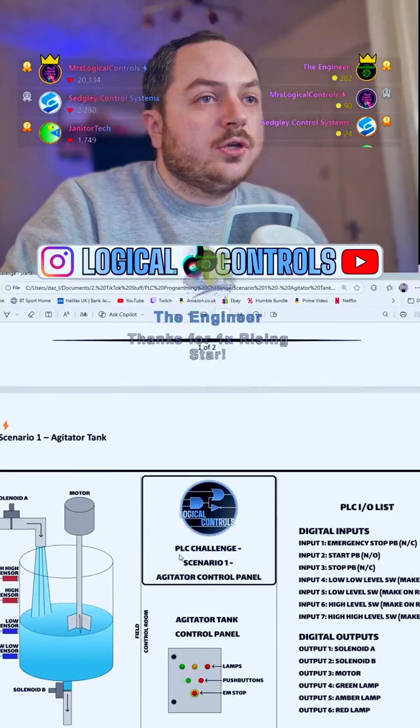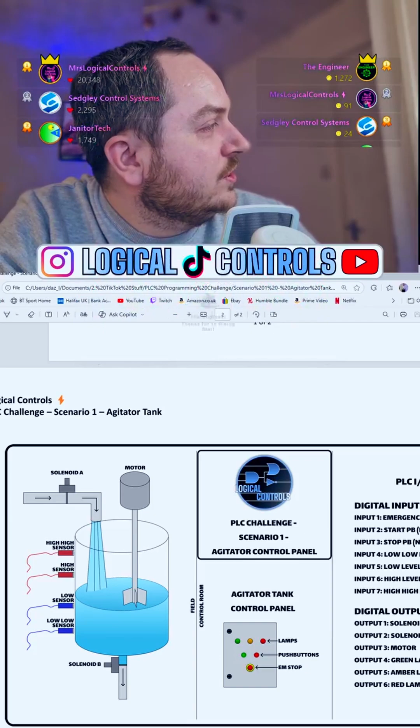The engineer, thank you mate, I appreciate that, smashed it again, Rising Stars. How many did you send? Whoa, how many is that? 1, 2... that's going to keep going off because you sent it one by one, but I appreciate that mate. I don't even know how to turn it off. Here we go, money talk - yeah, I've changed everything, I don't even know how to turn the sound off anymore.

It's a tune, but when it goes off a lot it winds me up. Wonder if I do that.

I don't know, we're going to have to go through it guys. Yeah, you're an absolute legend, the engineer, thank you mate. I hope you're not still on site struggling, I hope you get to bed early tonight. But just to go back to that, Christopher, yes, this document was what we've gone through tonight, from the challenge.

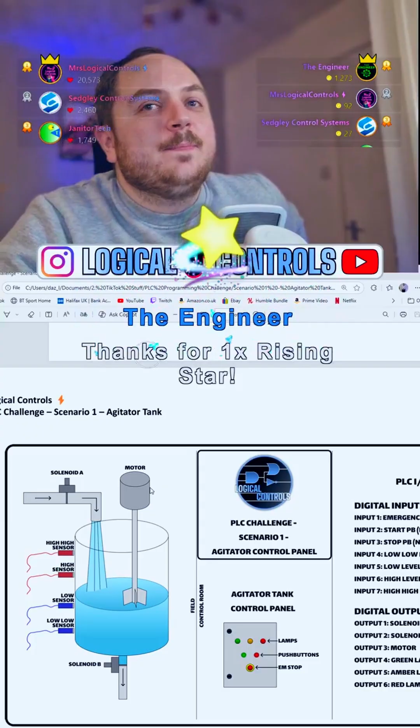So just to go back to that then, if you click on my Discord, maybe once a month - I haven't quite decided what frequency - I'm going to basically go through these challenges. I'm going to make a new one every so often, and everything you've seen tonight was based off of these challenges.

Yeah, no, it was good mate, it was good, Critical Shift. Yeah, we looked through yours, Big Loz, Off-Flight, and Ash's Sedgley Control Systems.